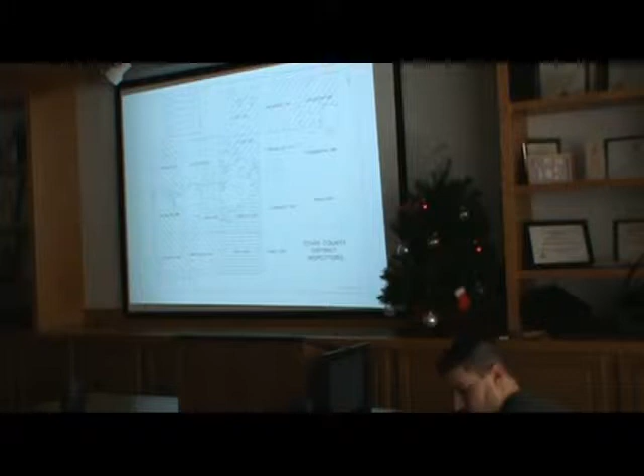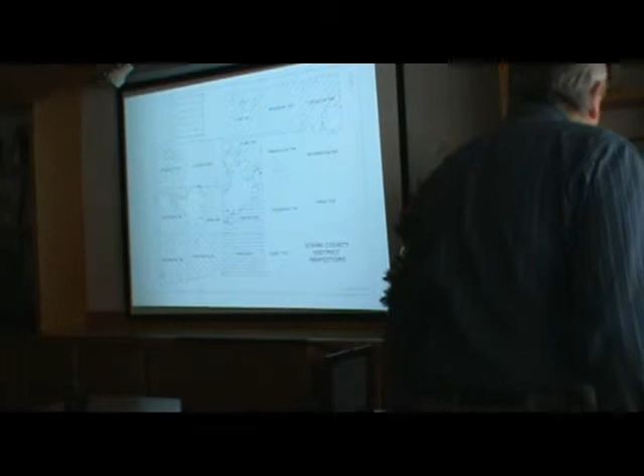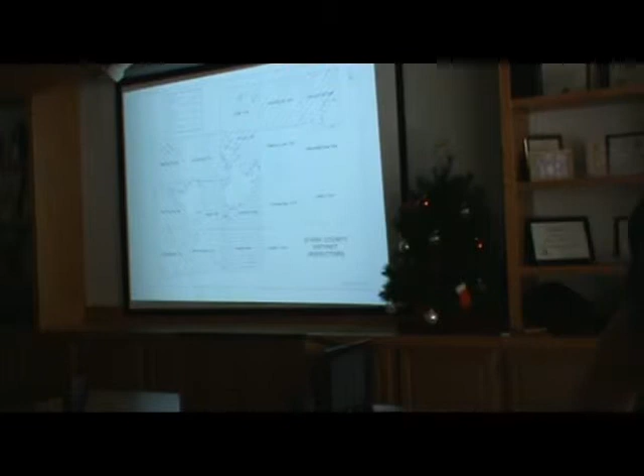I have been asking the guys to tell property owners, especially on new home construction or a new building, no paint, because we run into that issue. They will plug the sand in your mound, and we'll be back out there trying to figure out how to flush all that paint out. So have them take the paint brushes, wash the paintbrush out on the ground. Don't put it in your expensive mound.

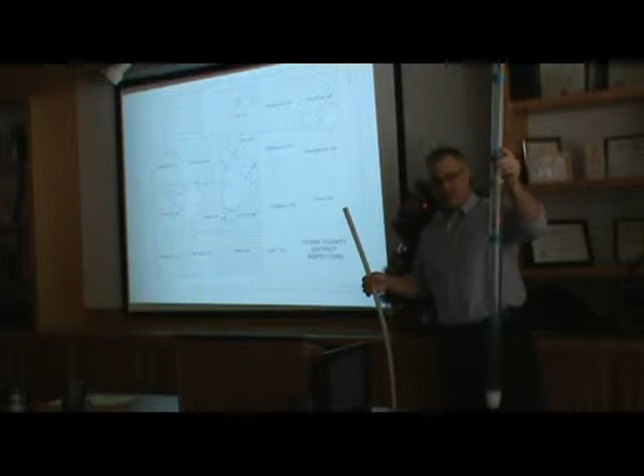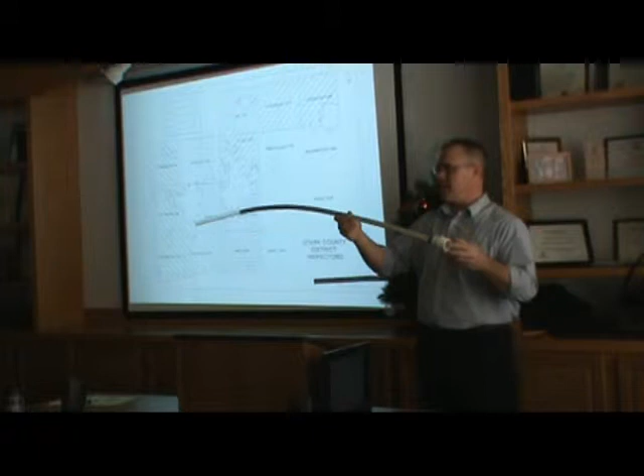These are what we used to use, this one was donated to us. This nicer one is something you could probably make yourself. It's just a piece of PEX pipe, translucent, with some fittings and bushings at the end and a hose clamp. It does the same thing, not quite as fancy. A drop of dye in the water will help you see it better since it's not as clear.

Another thing I wanted to mention, this is a terrible drawing, but for those of you doing these inspections, you may see a series of observation ports on the mound, and I want to help you understand what the difference is.

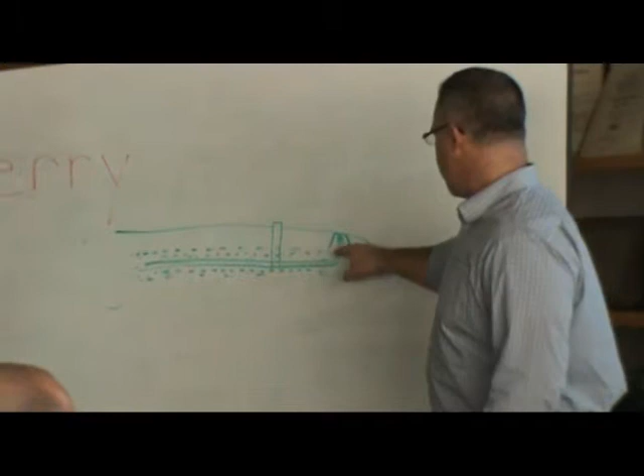There are two different ways installers will set these up. One way is they'll have the turnups mentioned in the video, with one observation port or inspection port to access that. So you'll see this sometimes.

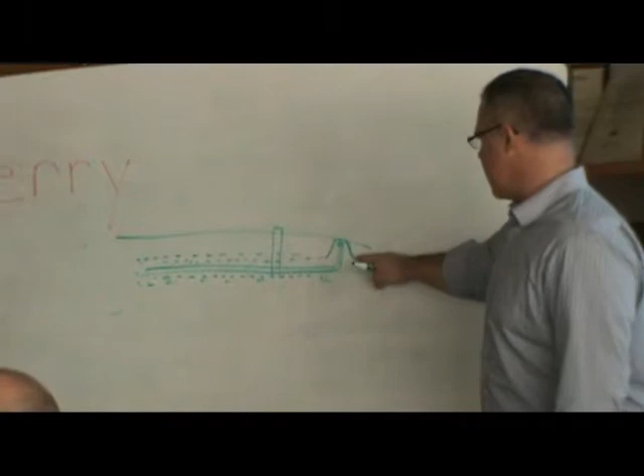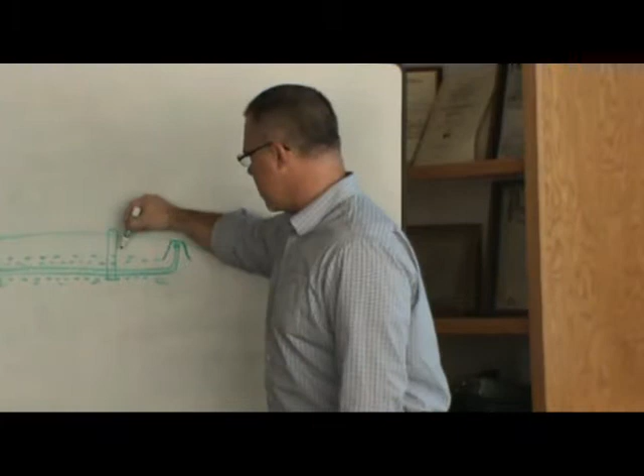Elsewhere on the mound you'll see 4-inch pipes sticking up, which are used to observe the ponding level at the gravel-sand interface. You pop that open and you'll see holes drilled in the side of that pipe, allowing you to access the ponding levels inside the mound. That's important to record, just as much as you'd record ponding levels inside a leach trench.

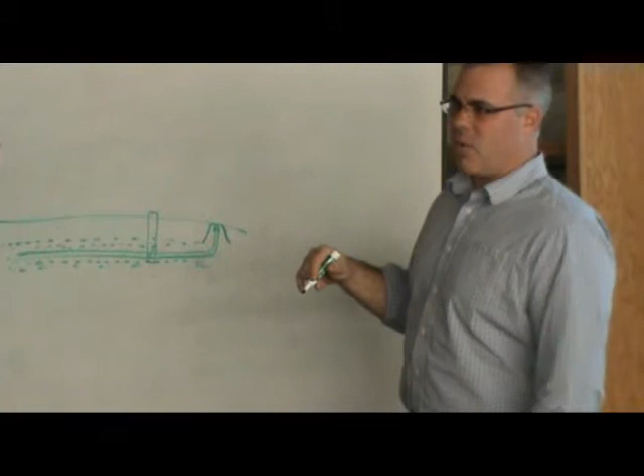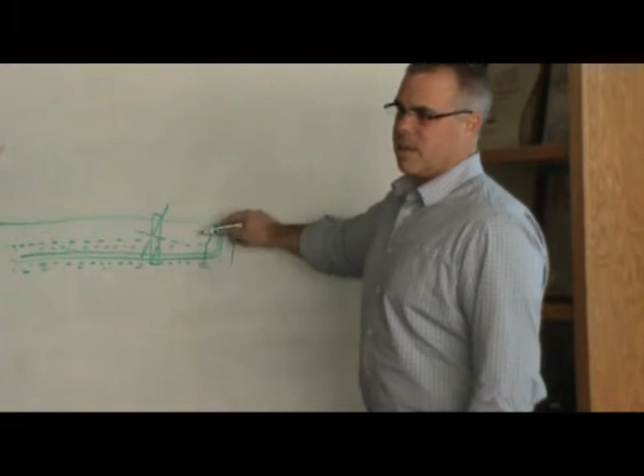The second way this is accomplished is some installers will make this a 2-in-1 deal, which is fine. They'll eliminate the separate ports and use the turn-up access as an observation well too. So you may only see one of these instead of two.

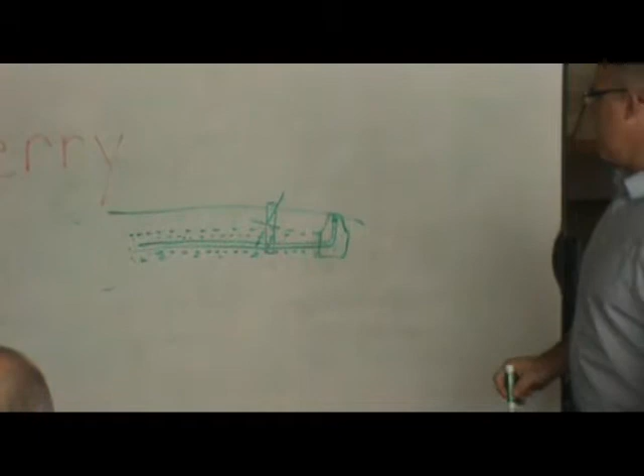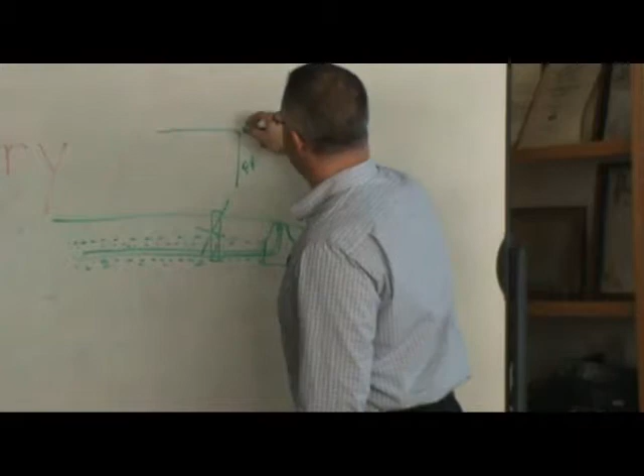Another thing about mounds: if the flow is coming from the force main or lift tank, most mounds are set up with a single T inside feeding both ends. So this would be the lateral spraying water inside, with a turn-up at each end. That's the most common setup.

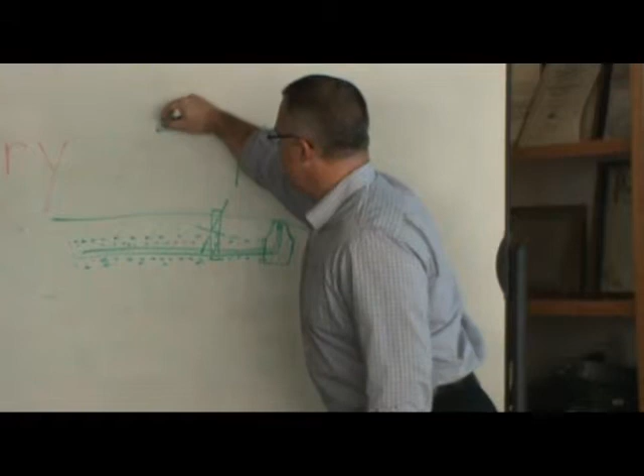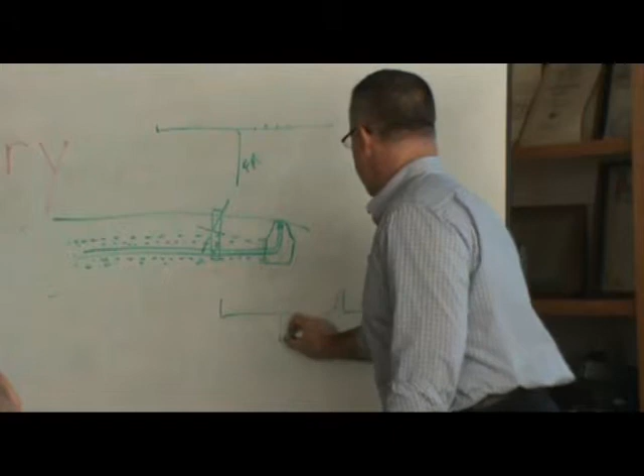The one we just saw in the example was actually set up differently, like this. This is your force main, this is called your manifold, and here are your laterals with turnups at each end.

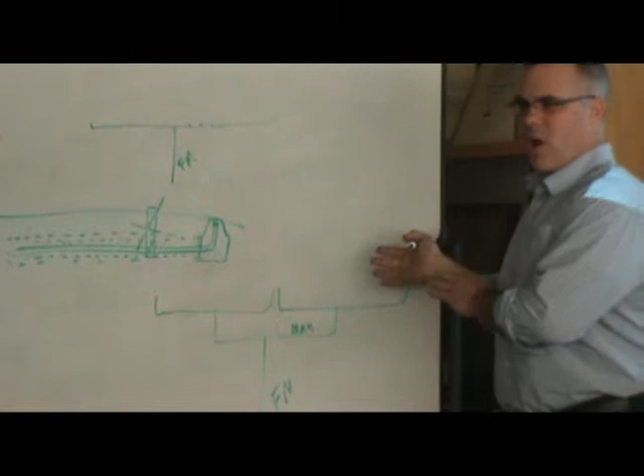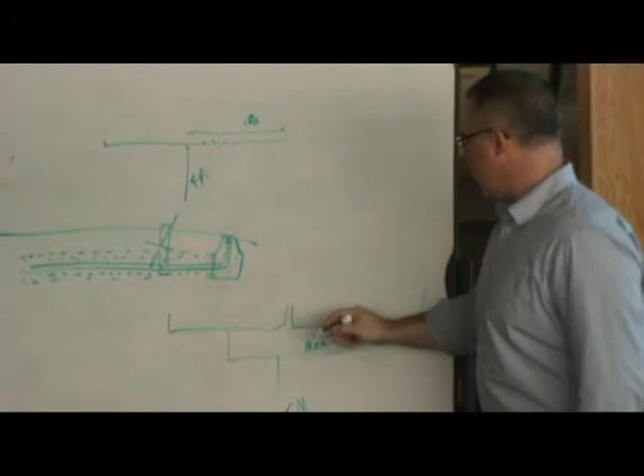The reason they're done differently is because there's a lot of math involved in figuring out how to equally distribute that effluent across the length of the mound. When you design a mound, you want no more than 10% difference in flow rate from the center to the end. In this example, it was greater than 10%, so the designer decided to do this to cut that down to no more than 10%.

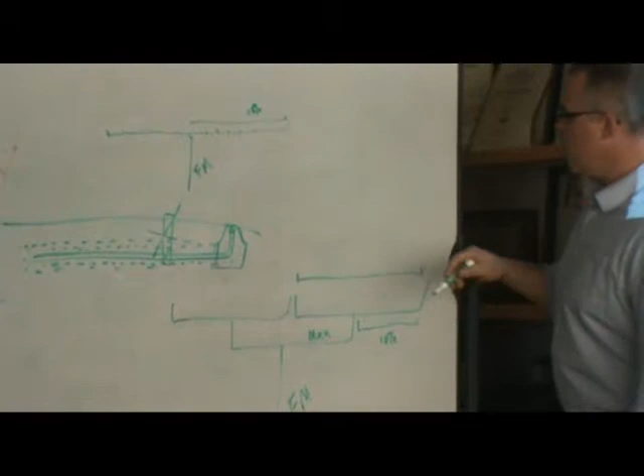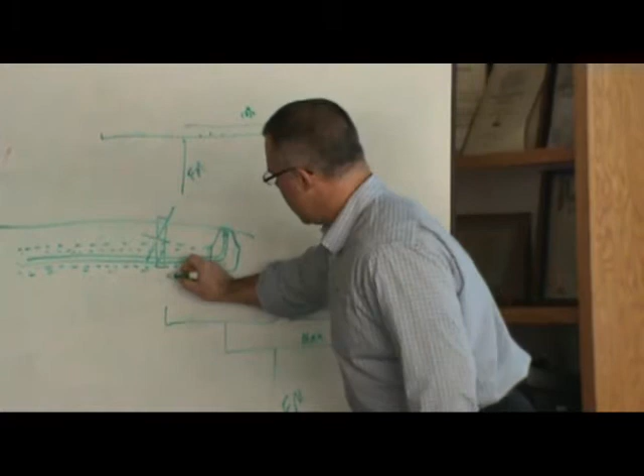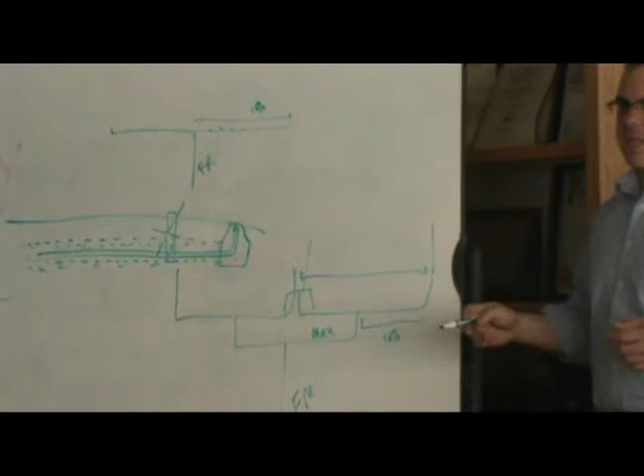So as you're inspecting these mounds, you've got to keep an eye on which setup this is. And when you inspect it, make sure you put those squirt tubes on each of these points. Sometimes these two center ones are in a common box so you can access both at the same time. Any questions about that?

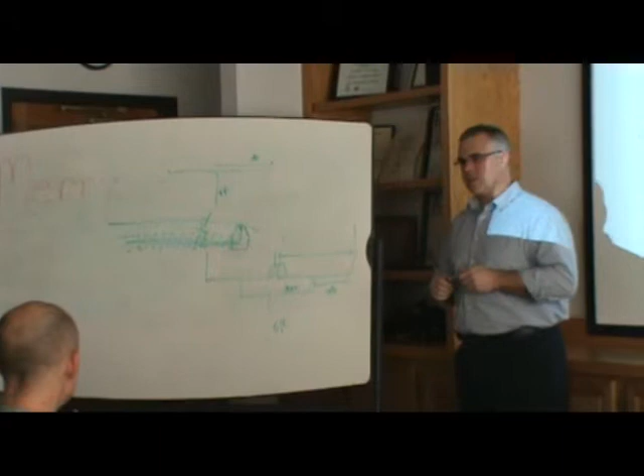Is there a zoning that the squirt height will be in, or who do you get hold of? Yeah, that's us, for the baseline. When you request records from us, make sure that's included, and if it's not, give us a call.

To be quite honest, the clerks don't always know what they're looking at, they're just sending you records. So if you don't see it written on there, call back, because when that mound was inspected, we had to note what the baseline was.

Do they vary that much between mound to mound? Yes, they do. They're typically designed at 3.5 to 4 feet, but it depends, because sometimes the pumps are oversized and they'll put out more.

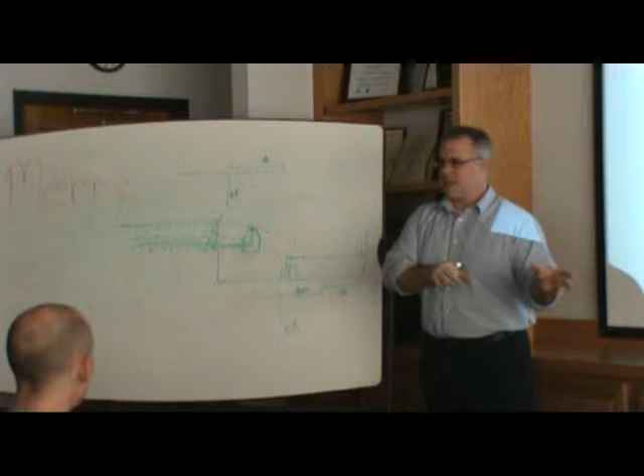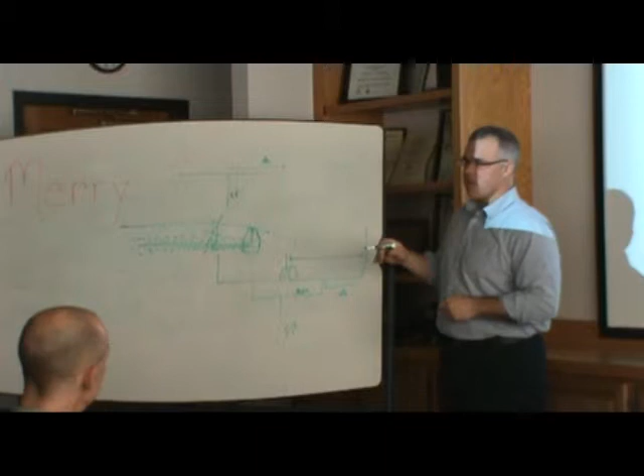Sometimes they put ball valves in there and they'll put out less. So it does vary quite a bit. The average is about 3 to 4 feet, 3.5 feet. And we are watching, like in the example we saw, there was quite a difference, more than 10%, from the beginning when it started till when that mound was inspected.

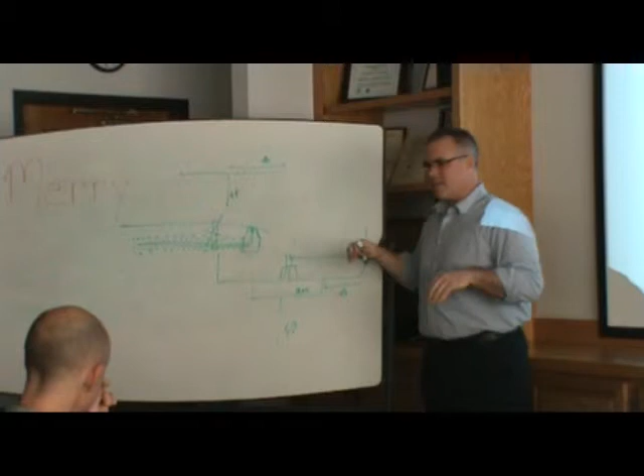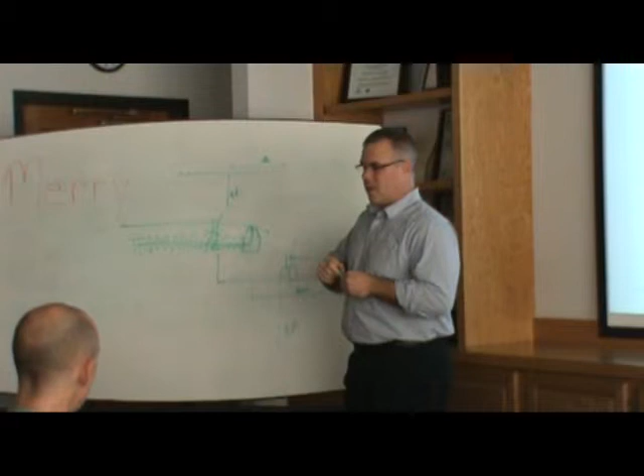That indicates maybe something's going on. Probably the likely thing is those holes have already gotten some plugging going on. Whenever you see a higher pressure at the end, the likely problem is plugging in some of those orifices. If you see much less pressure, perhaps there's a leak in the force main or something else is going on. So when you report that back to us, it tells us we need to figure out why that thing has changed since its initial startup.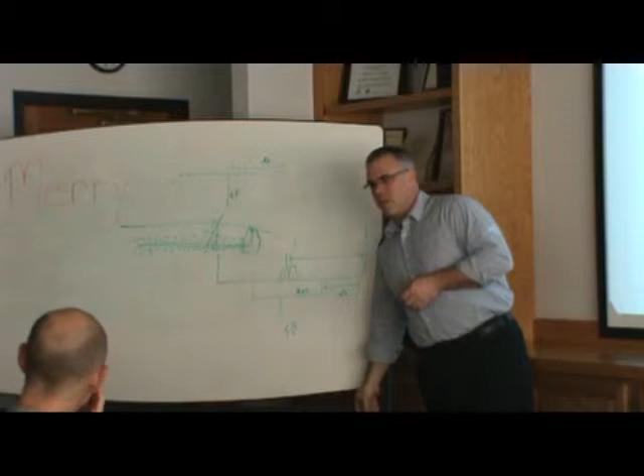We recommend that back to a service provider for it. You can say, if it's drastic, it needs further evaluation. We'll take it from there. We'll decide how drastic it is. Are there any other questions on the mound inspection?

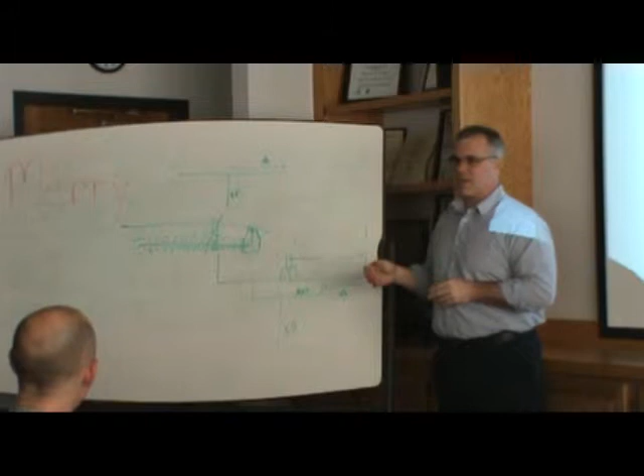Todd, just a comment: when they do the install on that, they need to be flushing the plastic out of those lines before we come, all the shavings from drilling the holes in that pipe, so that all of that is cleared out when we come to do the inspection. I was going to mention this later on, but I might as well mention it now since we're on the topic.

There's a caveat I want the inspectors, well actually everybody, to understand about these mounds, and we need to get it corrected. Okay, so we have a lift tank, and you're coming off, going up to the mound, and a float, and let's just say this is a timer up here. Almost all mounds in this county, maybe with a few exceptions, are time controlled. The LPP pressure system inside of those is controlled by a timer.

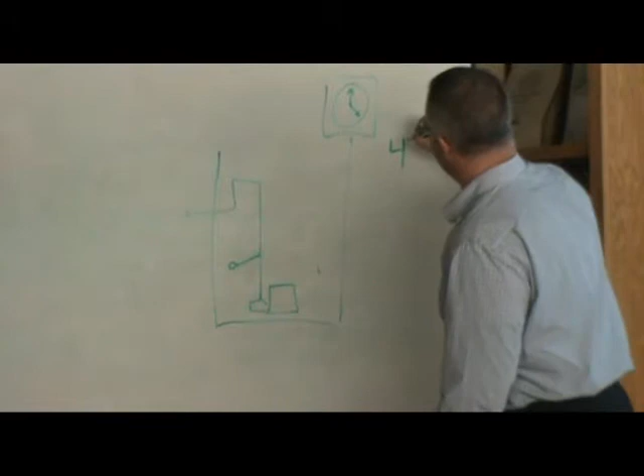And the code says the dose frequency has to be every 4 hours or greater. It can't be like 2 hours or 3 hours. It has to be 4 hours or greater. Scientists said that if you time control it so you're not heavily dosing it dose after dose, it's best for the mound, it's best for the long-term operation of the system. So that's where time dosing comes in.

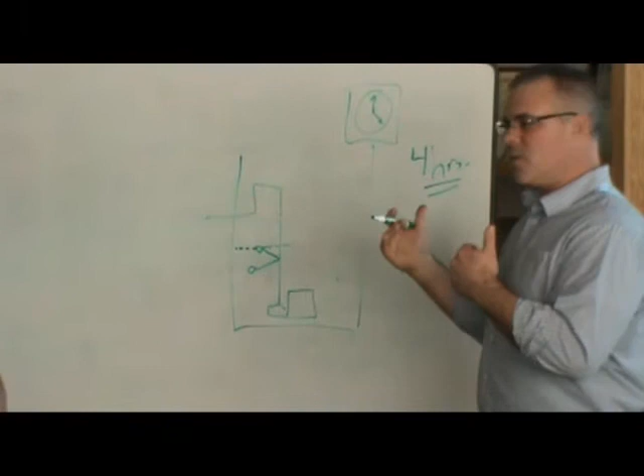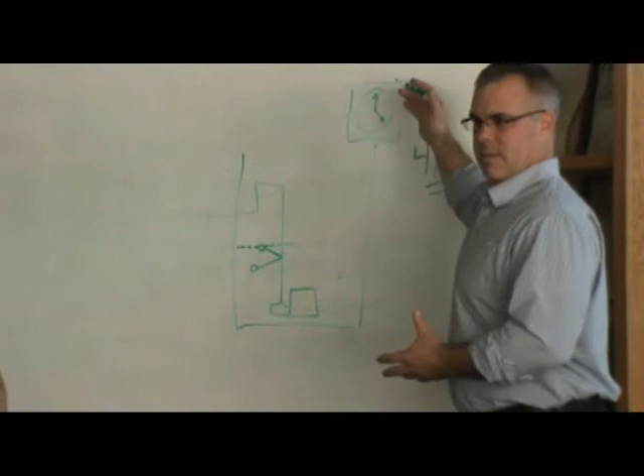Now, these timers operate differently, but what will happen is, let's say that this is the water level that is required to have a full dose in the mound. Those floats are set so that there is at least a full dose to do a dose. So let's say that it gets to its on position, but the timer is still counting. So let's say the float rises a little higher, and that's where it actually kicks on.

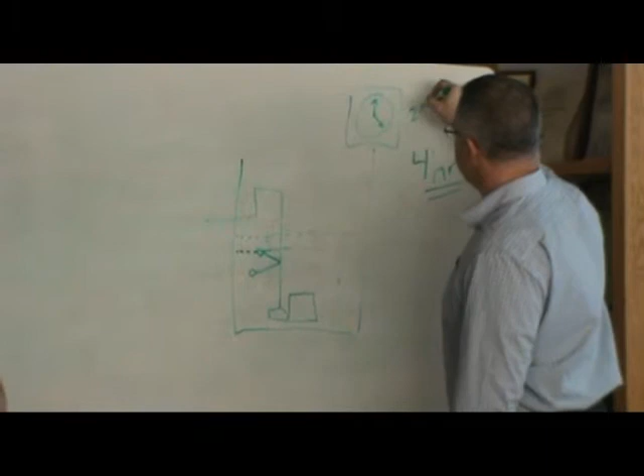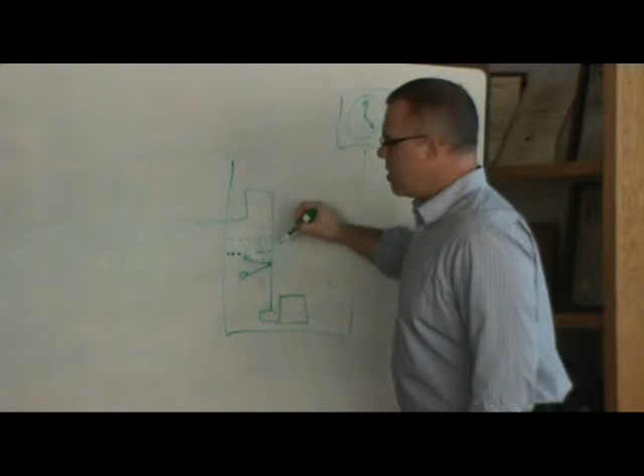So it kicks on, runs its 2 or 3 minute cycle, and this float then drops down, let's say, to this position here. If anybody's done any pump work, you know that that float isn't off yet. It hasn't dropped clear to the off position. So this float dropped to midway down. And let's say that household doesn't run any more water, and it stays there. The 4 hour interval comes up again, and the timer sees that float is on, but it doesn't have the full dose.

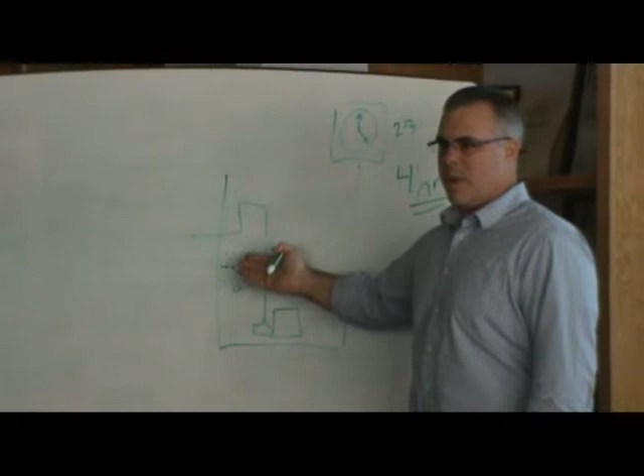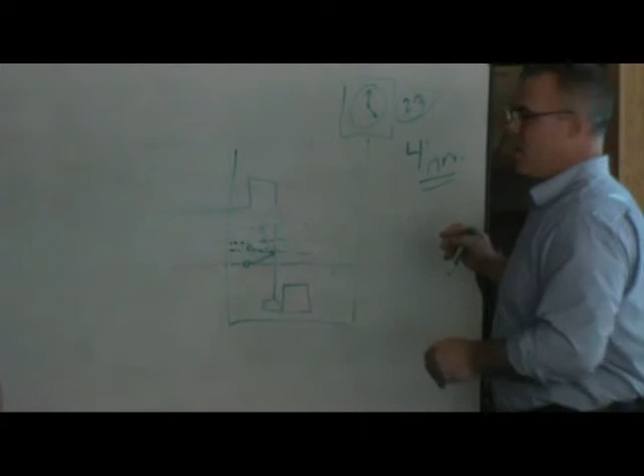You see where the flaw's at? It can do short doses. This is going to dose at this level, drop down to its off position, and turn the whole thing off prior to the full dose cycle running. Why do we care? Because mounds and LPP systems are designed to have a particular volume of dose, which is 5 times the internal volume of that piping I showed you. So sometimes it's going to run a short dose into the mound or the LPP system. Why is that also a problem?

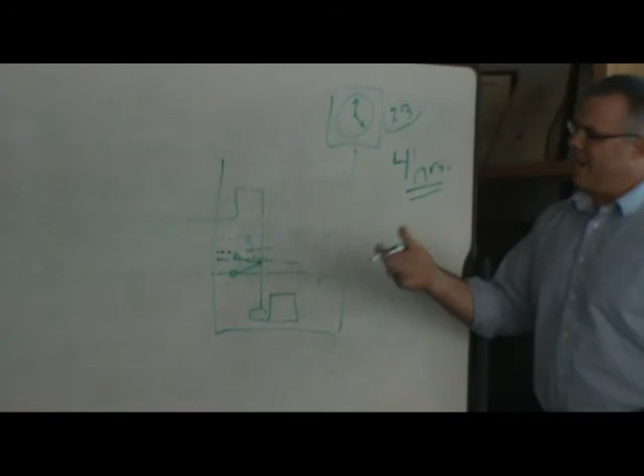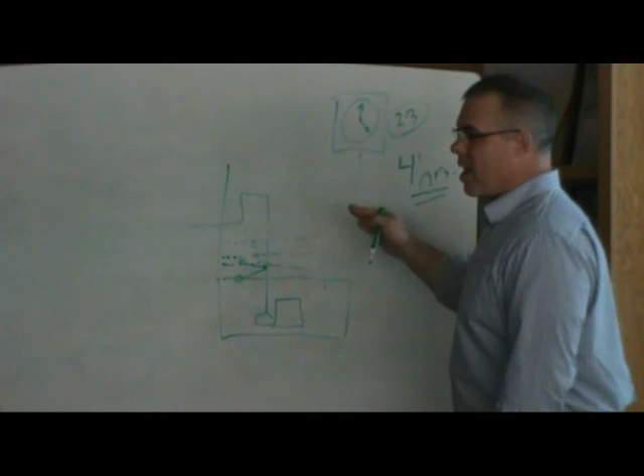Because that event counter that you took the numbers off of is counting all those short doses. So when I come out there and say, oh, you're using too much water, is that really true? You don't know necessarily. So very shortly, I've talked with several of the distributors, some of which are in the room here, and we've got to eliminate this problem. And it really boils down to controls. Their controls need to be modified or floats need to be added. There's various ways that it can be changed.